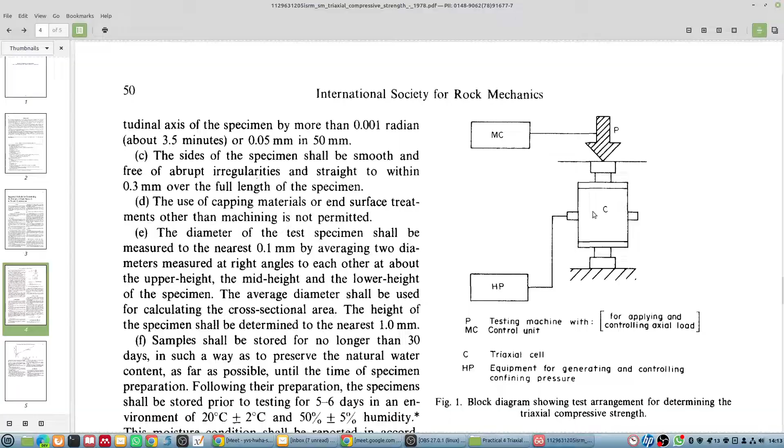So what you have to do is take at least 3 samples for testing, but the standards, whether it is ISRM or IS, recommend at least 5 specimens to be tested. So what you do is provide a confining stress of, say for example, 10 MPa, then here it is 35 MPa, here it is 45 MPa or so, and below these levels also 3 MPa or 6 MPa or so.

So one of the samples, say for example, you have provided a confining stress of 3 MPa, it breaks at some point, so that point is noted, and that is somewhere near, say for example, 85 MPa. That way you plot the lines, and then you try to get a regression curve, and from that regression curve you draw the line, and that will give you the curve for the failure criteria. And if you have carried out the regression, you will be able to know the equation of that line. So that's the basic purpose for determination of triaxial compressive strength.

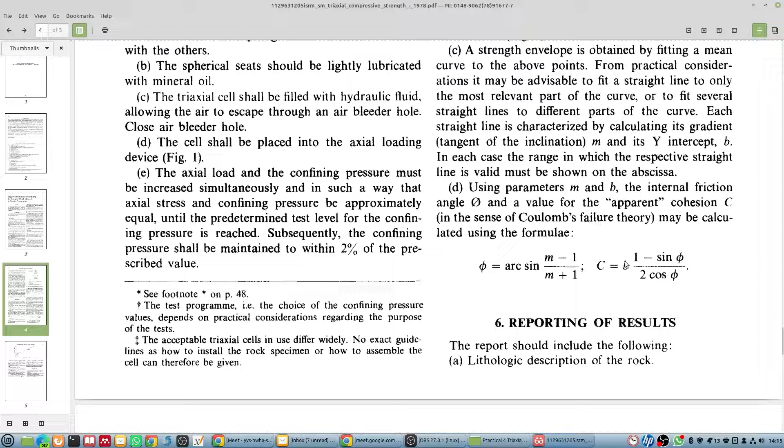Finally, the output you get from this is your C and phi values - apparent cohesion C and the friction angle. Here M and B are two constants which you get from this sigma 1 versus sigma 3 curve. M is the slope of this line, and B is the y-intercept, or the intercept on the axial stress axis.

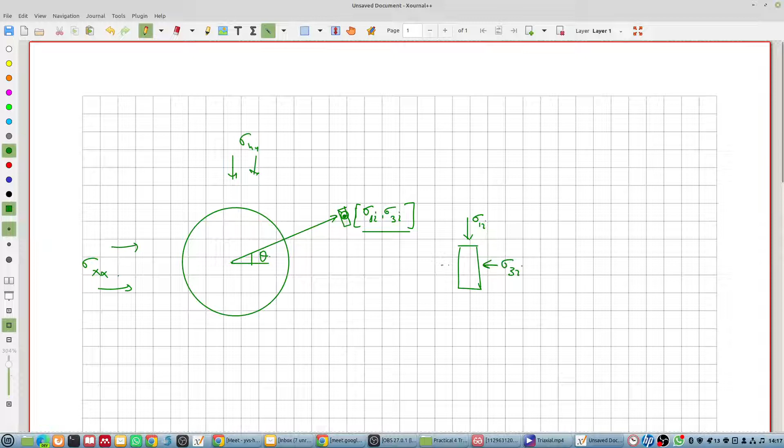So what is happening here is that this sample, or small element, you can take it as this sample. This sample is loaded from two sides with stress sigma 1i and sigma 3i. So this is known as your confining stress.

Right, you can look at this another way too. Say for example, if you take one element here, what happens? At the skin of the boundary, sigma r will be equal to 0 as per Kirsch's equation, if you see. And sigma theta will have some value. This is it, sigma theta. So here what is happening is that the rock is in a state of uniaxial compression.

Sir? Okay, yes, tell me. Sir, what is sigma RR and sigma theta theta? Have you studied this in your BTech? No sir, no. Okay, let me find the lecture material. If it is there, I'll show you.

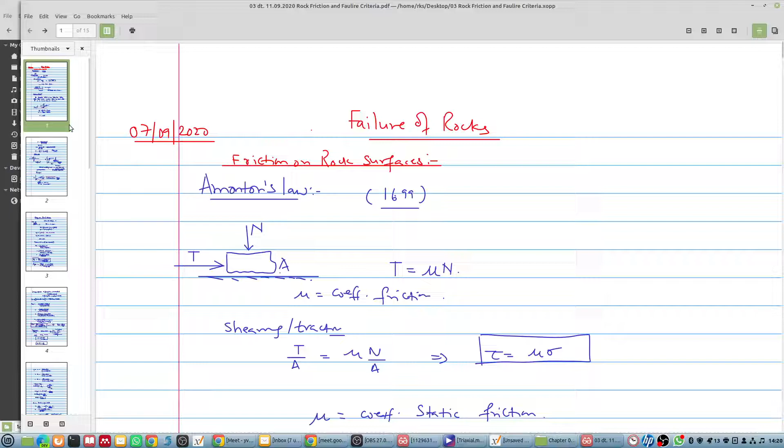This picture is very dirty and I have to write many things. Okay, anyway, I will not make it dirty further. So this is the tunnel which we had seen.

Kirsch's equation is given for a condition in which you are excavating a tunnel and your boundary stresses, or the in-situ stresses, are sigma xx and sigma yy - the pre-mining stress at this location. And then if your tunnel has a radius of a, then at a distance r, you can very well find the stresses, the components of the stress.

So you are a mechanical engineer, so you must have read solid mechanics and you know what is principal stress, what is shear stress, etc. Isn't it? Yes, sir. Right. So this is my tunnel.

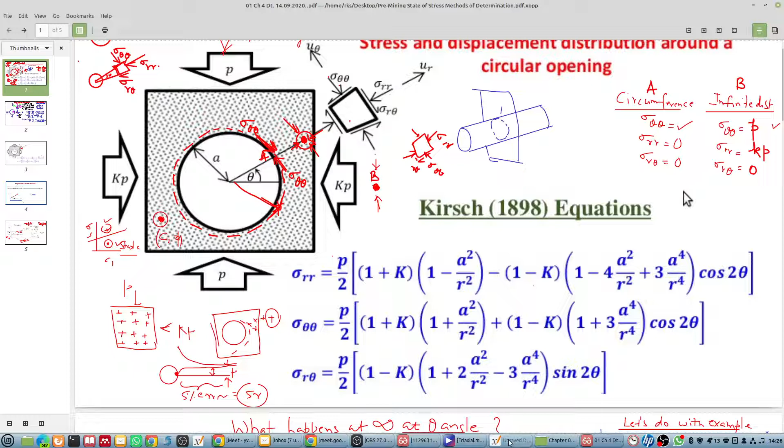So effectively what is happening here is that any element at the skin of the excavation is loaded only in one direction. That means your rock specimen is loaded only by sigma theta theta and not by any other component.

Now, let us consider the same thing. Is there an example? In this equation we have done it for this at infinity. What will happen, that exercise we have done. Sir, one minute, one minute. Yes, what was the doubt?

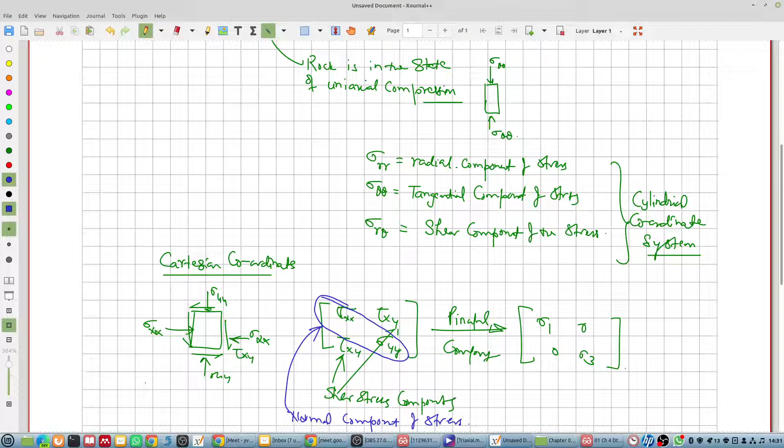Okay, for rock mechanics, shear on this plane, if it is down, then it is positive. So this is negative. Is it clear? Above is negative in rock mechanics convention. Mechanical engineers will do it the opposite way.

Why is that? Because all the stresses are compressive in nature in rock mechanics. So every time if compressive stress is taken as negative, when you calculate, a lot of negatives appear, which looks awkward. That's why rock mechanics people have preferred to take compression as positive and tension as negative.

Whereas mechanical engineers deal with a lot of tensile stresses, so they treat tensile stress as positive, so that in their calculations all positive numbers look good. That's the convention.

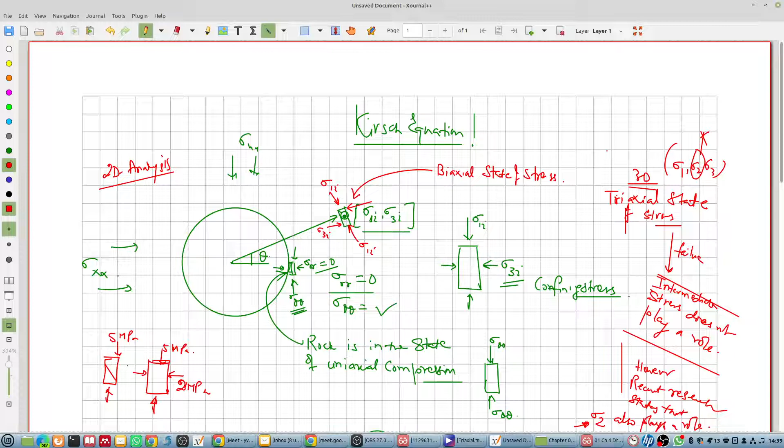Now tell me, if I apply 5 MPa and the rock breaks, but if I compress this rock by 2 MPa and still apply 5 MPa on the same rock, is it going to break? No sir, it needs some more pressure. This is what your failure criteria requires.

So what you have done is, on one side you have sigma 1, on the other side you have sigma 3. When sigma 3 is small, the rock will break at a smaller compressive load. Now on another sample, you increase it, so this is 1 MPa and this is breaking at say 5 MPa, and now you load it at 2 MPa. So it is going to break at a load higher than 5, let's say it is breaking at 7 or 8 MPa.

So that way you go on testing a few more specimens, increasing the confining stress, the side stress. That is known as the confining stress. Why are we calling it confining? Because the element here is confined from all sides, and because of the confinement, this rock will require more value of sigma 1 to break, whereas here there is no confinement, it is under uniaxial compression, so it is breaking easily. This is the way you try to find the curve.

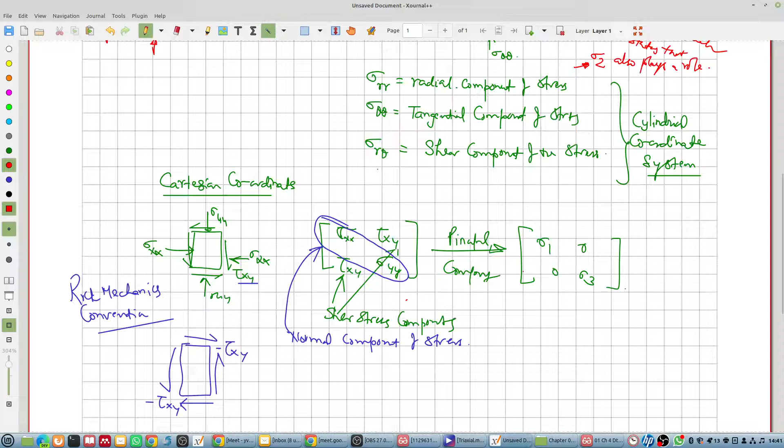So the Mohr-Coulomb curve says it is a straight line. Other authors will say no, it is a non-linear line. Many people have given curves for this failure criteria. So this is what we have to find out, and in order to simulate this confinement, we need a setup in the laboratory. So that setup, we will see how that setup is made.

Okay, now is that concept clear? Why? What is confined stress? How is the failure governed?

Yes, right. So as we go away, the rock is under triaxial state of stress in general. There the failure of the rock will be difficult, whereas near the skin of the excavation, the failure of the rock is liable to be more.

If the strength of the rock is very high and this induced stress sigma theta theta is very less than the UCS, then there will not be a failure. Here also there can't be a failure. So your...

Pre-mining stress state, the size of the excavation, and the strength of the rock - these three data will tell you whether there is going to be any failure at the skin of the excavation, or up to what depth the failure will be there. Sometimes the failure can be up to this depth also, like this. This depends upon the failure criteria, and failure criteria or the strength of the rock can be determined from this curve. Now is the concept clear?

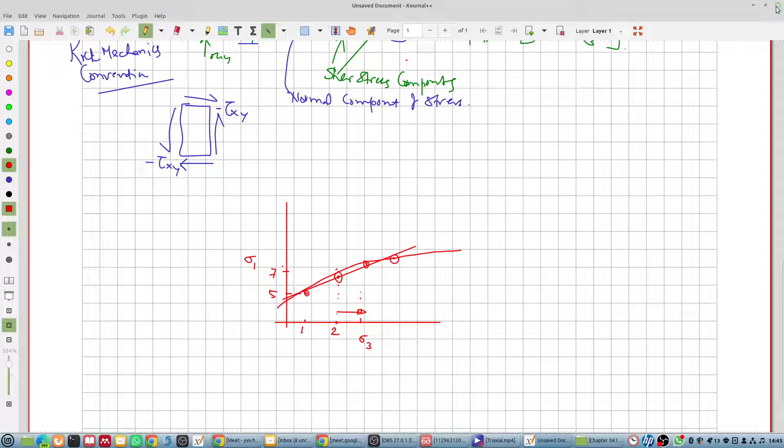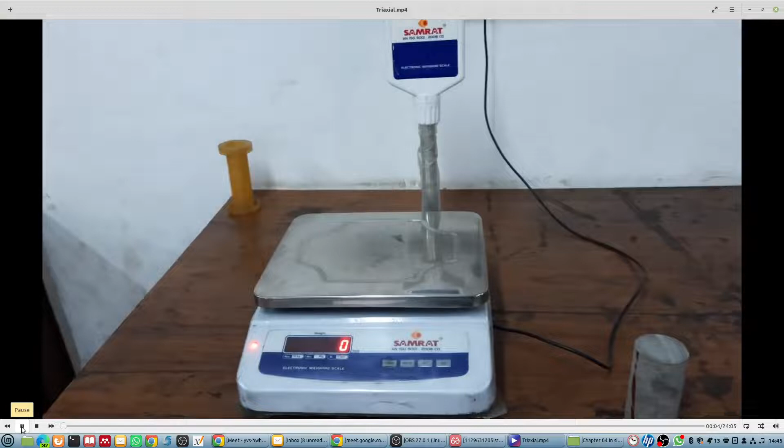Right, so how do we do the experiment? What you require is basically a weighing machine to know the density of the rock. You need a specimen.

And this is known as the triaxial jacket and the loading platens. We'll see how these things are used. This and you require a measuring tape, and this is your hoek cell.

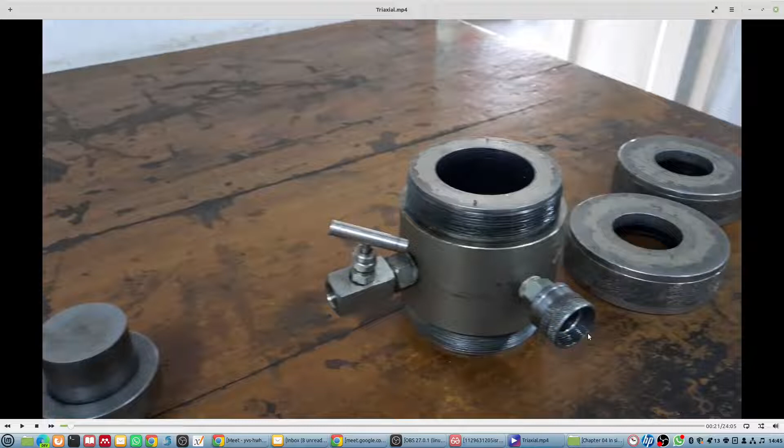It is nothing but a hollow cylinder through which you can place the oil. And when you place that hoek cell, that rubber thing you have seen, it will form a jacket, and then it will be able to provide load onto the specimen. These are the covers for covering the thing.

So this setup was designed by Hoek, that's why it's also known as a hoek cell or a biaxial chamber. Because why do we call it biaxial? Because we are applying sigma 3 on all the sides and sigma 1 from the top. So only two axes have the stress.

A little bit more you will see. So they weigh the rock to know the density, right? And if you calculate its length and diameter, then you can find the volume. From the volume, you get the density. That's why it's required.

Okay, so this is measuring. That is additional data. It's measuring the length.

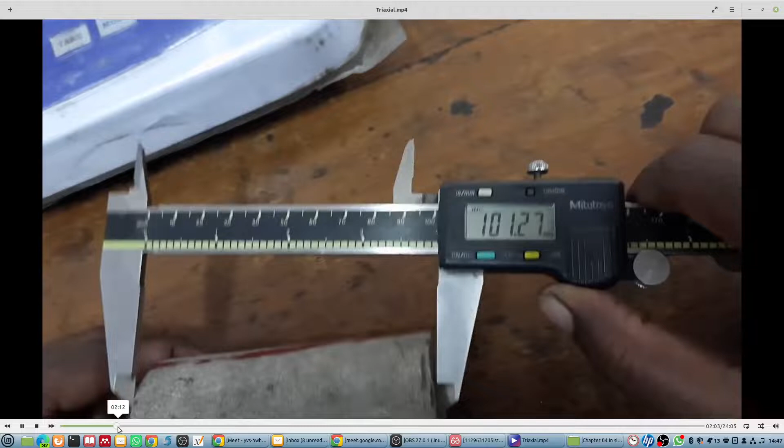And this is your hoek cell. Now inside this hoek cell, you have to place the specimen. And from outside this jacket, if you pressurize it through oil, then you are able to give a confining stress onto this. So that sample - this is hollow.

These are the two holes through which oil can be pressurized. This is for pressurization and this is for venting out the air from the cell when you are filling the oil. Right, so this hoek cell, they will first fix the jacket into it.

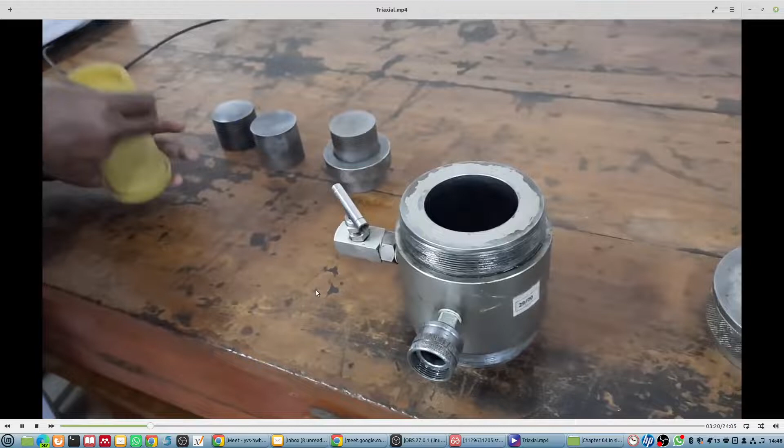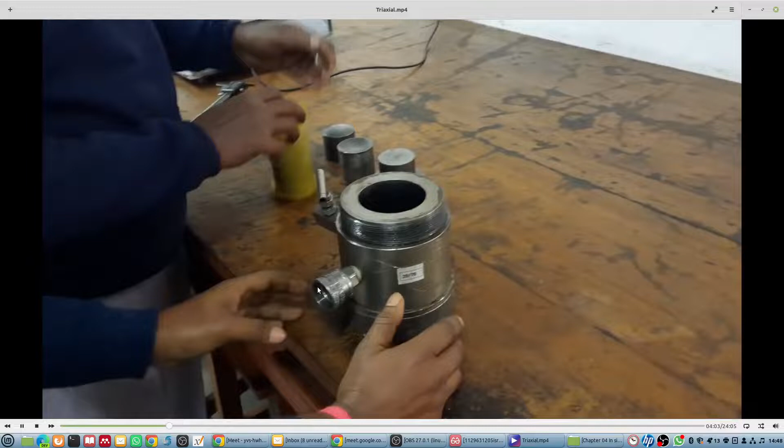This jacket they will first fix it into the hoek cell, and you see how tightly it will go. First we close it from one side. Then we place this jacket inside it. It's going like a piston.

Right, there, fixed it. Now you see, if you inject oil, what will happen? Between the cylinder wall and the jacket, oil will be filled. And if you pressurize this oil, what will happen? Because of that pressure, this rubber jacket will come out. So the rubber jacket should not come out - that's why we are placing a cap here. After that they will place a cap over this.

We give the platen from below for loading. This platen they are showing here. Then over this they place the specimen, then close the cap.

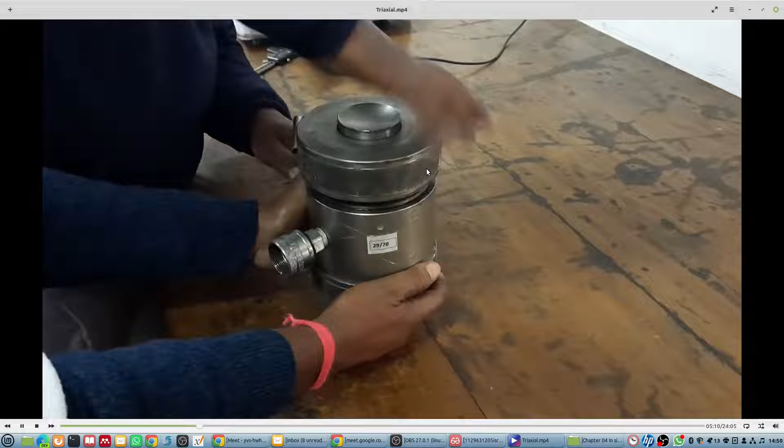This is the way they have fixed the specimen. Then they will place the cap, which will cover the jacket, the rubber jacket. So now whatever pressure you give, it will not come out, and it will compress the rock inside.

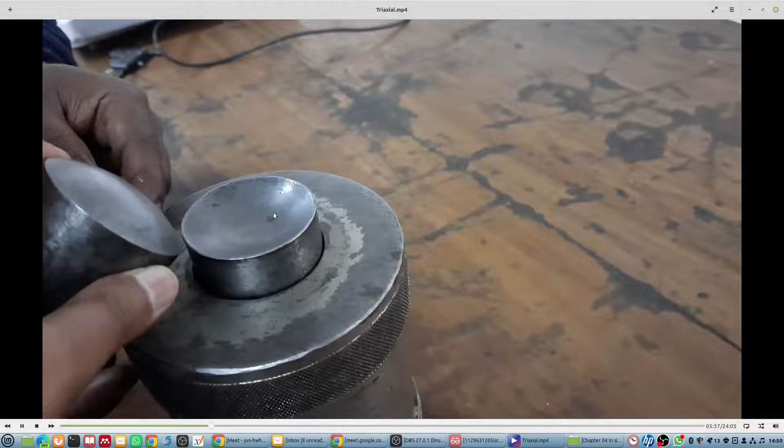This is the way you are providing compression confinement to the specimen, and from the top you can provide an axial load. This spherical seating is specially made so that even if the machine is not axially centered, it will center the load.

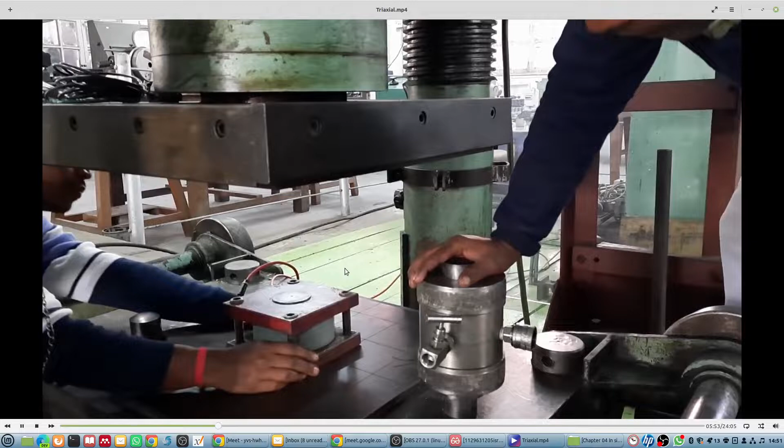Now you have to place this Hoek cell onto the compression testing machine. This is your load cell, to know how much load is coming onto the specimen. They will place this Hoek cell over the load cell.

They will try to lower the platen so that it just touches the spherical seating area. It should just touch the area.

This is the hose through which they will supply the oil and maintain the pressure. Through this hose they are pumping oil inside, and this tap is opened so whatever air is there will come out, filling the complete jacket, and then oil will start flowing. The moment oil starts flowing, you close this valve, and then you can pressurize the jacket with the pump.

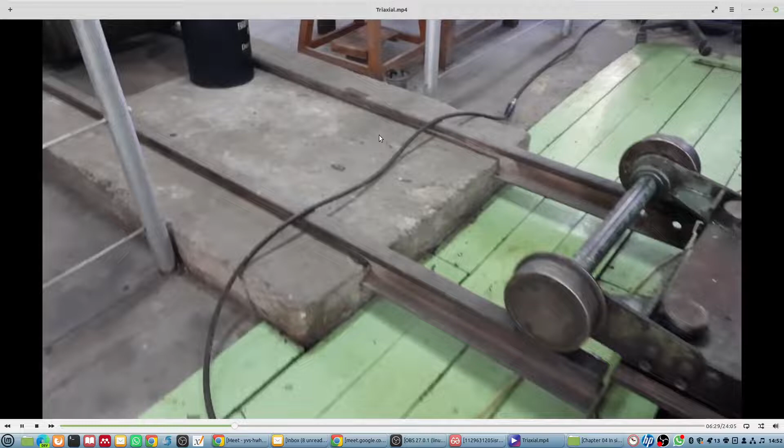Here they are venting out the air. This is the pump through which the hose from the Hoek cell goes, and through this pump we send the oil into the Hoek cell, and we can maintain a constant pressure on the specimen.

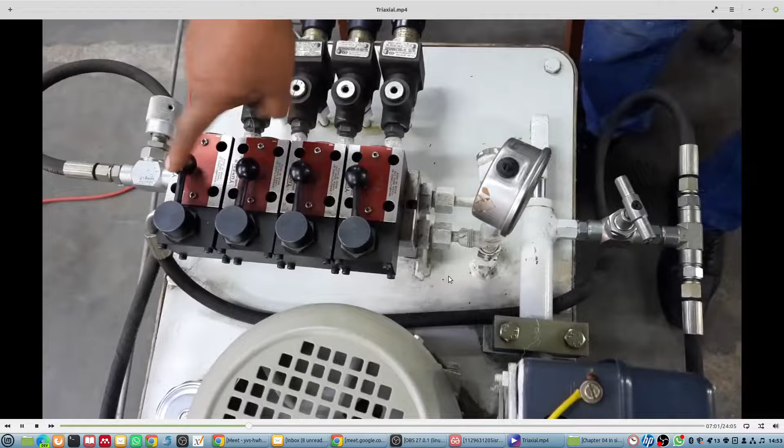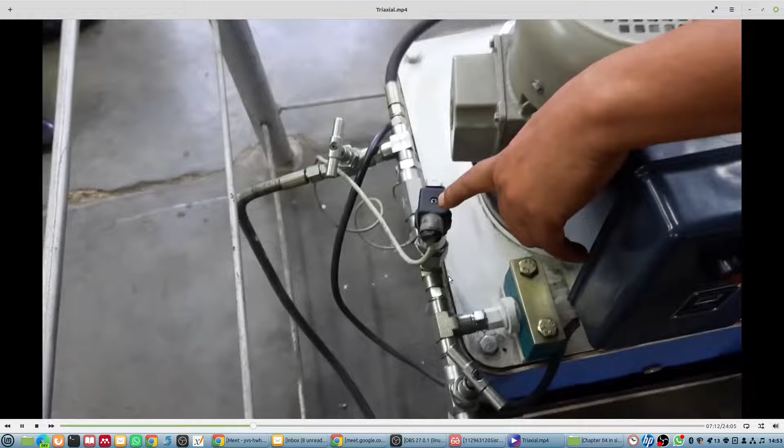This knob he is touching is used to control the flow, and there is a pressure transducer to measure how much pressure has been provided onto the Hoek cell. This pressure transducer reading is then sent to the data acquisition system.

He has opened the valve. Now he will switch on the motor pump. In place of this, you can use a hand pump also.

So they're sending the oil. Now oil has started flowing. They will wait a little more time so that all the air bubbles are completely driven out, then they will close it.

Now they will increase the pressure, so the increase in confining pressure can be seen from the data acquisition system also. Load and pressure, these two things will be monitored, that is the confining pressure.

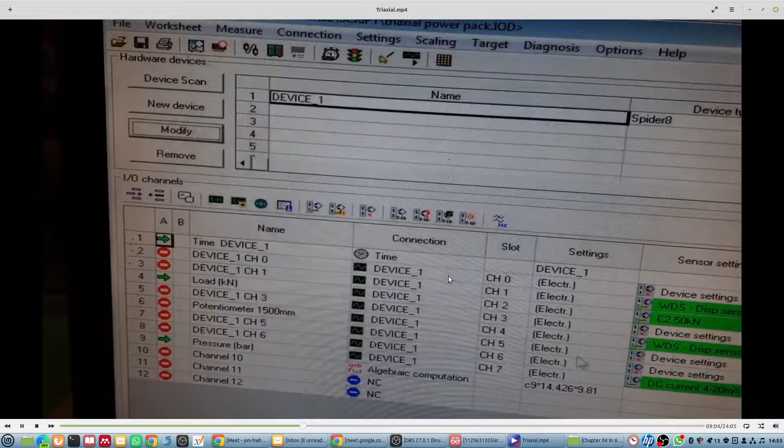This data acquisition part we had discussed in the uniaxial compression test. Same things are there. Then you have to go for logging.

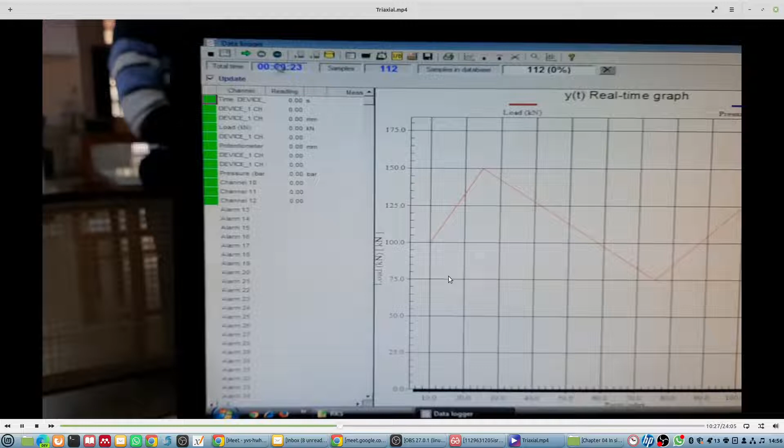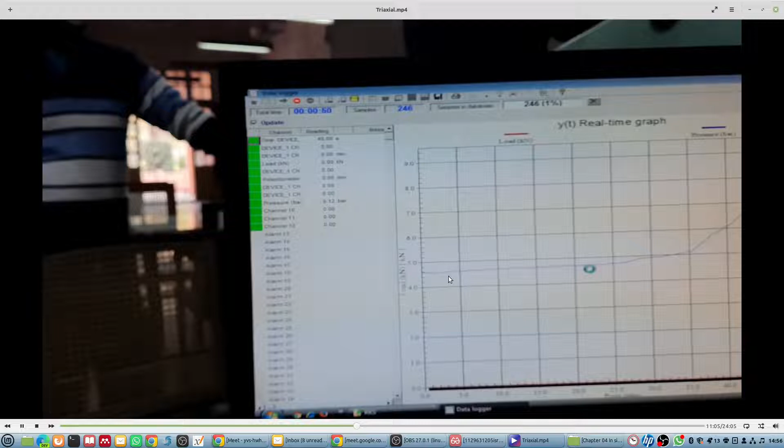Now they are increasing the pressure in the Hoek cell. That can be seen from this graph. Blue is the pressure in bar.

The first experiment will consider a value of 10 bars. That is 1 MPa pressure they have given.

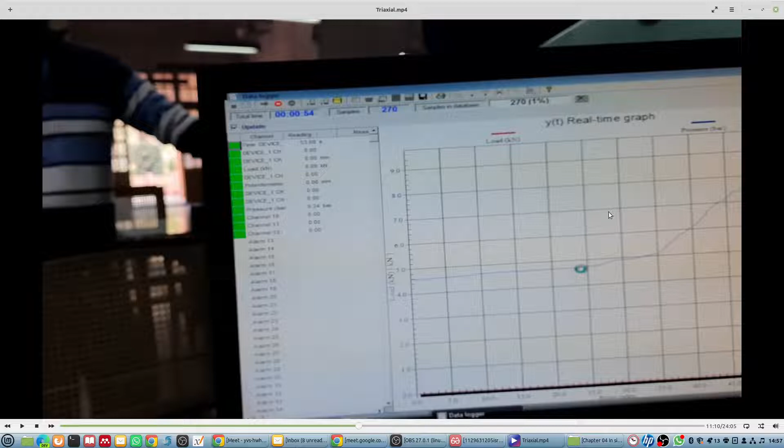10 bars given, yes, 10 bars. And then now they will start this loading machine for providing the axial load.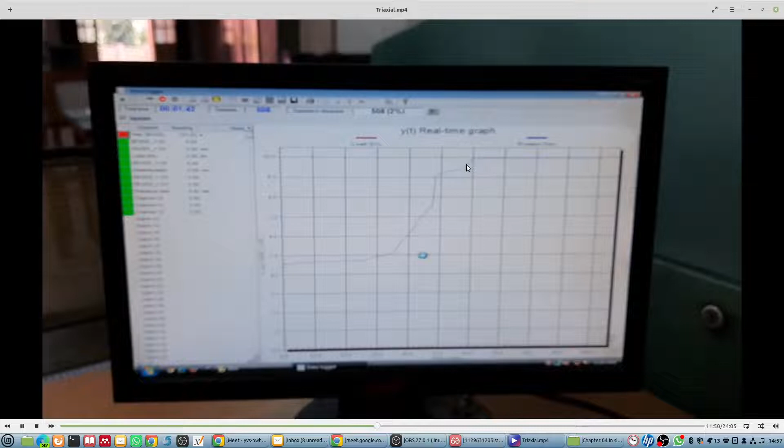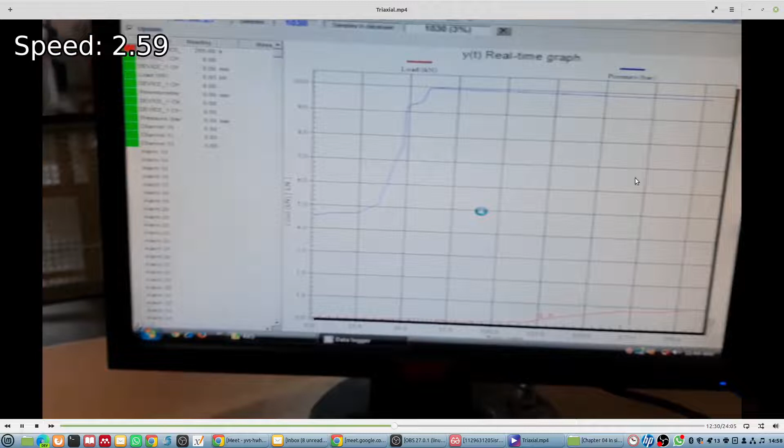Now, 10 bar maintained constant. Blue one is your confining stress, and now they are increasing this axial load, given in kilonewton. It will go on increasing. I'm increasing the speed.

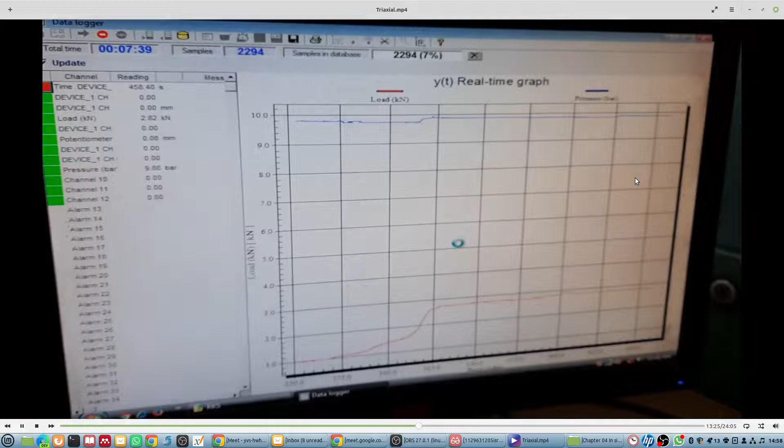So this has taken the load. The load it is taking now.

Anyway, we could not capture the failure this time. At the time of failure, your axial load will go on increasing, and then it will reduce suddenly. So there was an axial load versus time curve.

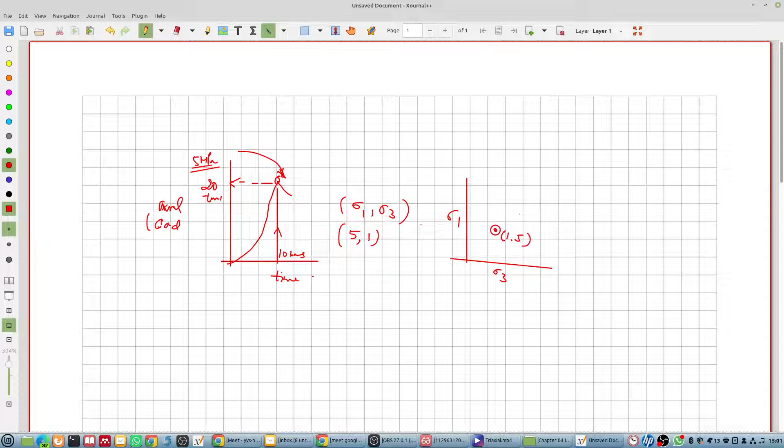So your strength is 5 MPa and sigma 3 is 1. For this curve, from one specimen, you got the point sigma 3 equals 1 and sigma 1 equals 5. So this point you got for your curve. Similarly, you will do tests for other points on the curve.

Once the specimen is broken, you can now remove the things and take out the sample to see how the fracture has taken place. Removing the sample is also a very difficult task - see how much difficulty they will have in removing this sample.

While inserting it was very easy, but now while removing it is very difficult. That's because the rock has broken along a plane and its volume has expanded because of the breakage. It's difficult.

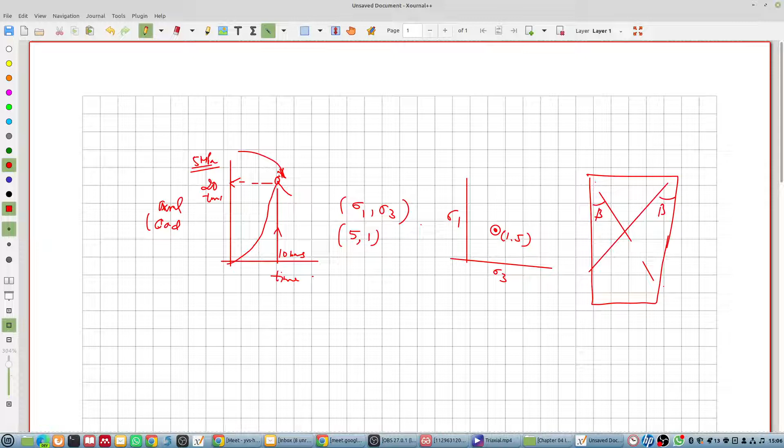Okay, it is something like this. One fracture angle is like this, another fracture angle is like this. Okay, and this is your beta angle. And here, this portion will look something like a cone. Right.

This is a part of another video. Anyway, so that's the way you find the normal load at the time of breakage. Okay, let me see that value.

Anyway, that value I will give you from the Excel. Okay, procedure is only shown in this video.

Now see, this is known as the process for each sample. For the next sample you can do, for the third sample you do this and then you find the curve. Another method is known as the multi-failure analysis, not multi-failure analysis, multi-failure triaxial test.

So what is happening here? This is axial load, and blue we can say as confining load, and this is your time.

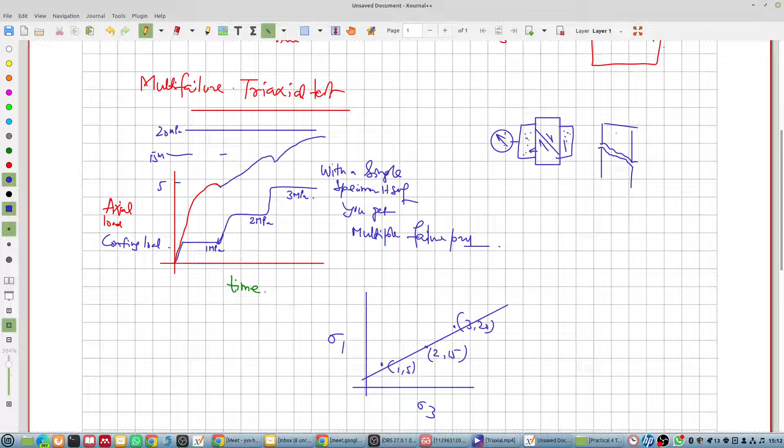And then you can get a curve. That first experiment, whatever video you have seen, was for the single failure triaxial test. In one go itself, the failure was seen. But if you have very less number of samples, you can go for a multi-failure triaxial test, and then find out the failure curve from a single sample by using this multi-failure test.

So in the video, we have shown one video for the multi-failure test also. One of the specimens was kept at 10 bar, another at 25 bar, another at some intermediate value between 25 and 50, and another at something greater than 50, and another between 60 to 75. So one level, two level, three level, and fourth level.

Fifth we were trying to do, but the sample broke away. So at least 1, 2, 3, and 4 — four points we were able to get from a single sample.

Sir, what is this point index here? In the x-axis? That is the time. In fact, while making this calibration, they might have forgotten to remove this. These are all user-defined things. So in fact, this is the time in seconds.

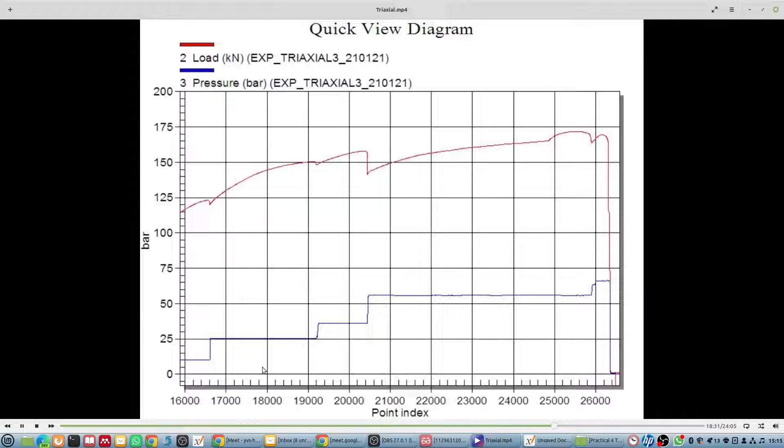In the data logger, you have the option to mark the points also. So x is your 16,589 seconds. Y is your bar, the blue line, so that is 10 bar. Then 25 bar, 35 bar, 35 bar again, then 55 bar. At 16589 time, it was 122.8 kilonewton, then 149.57 kilonewton, 157 kilonewton, 170 kilonewton. Like that, you can get those data from the data acquisition system also.

So this is showing you the complete view of what has happened with a single sample in multi-failure analysis. After the multi-failure analysis, let me show you what happened. We wanted to conduct more tests beyond this, but controlling the confining stress was a bit difficult at this point, so we could not get anything and the sample broke completely.

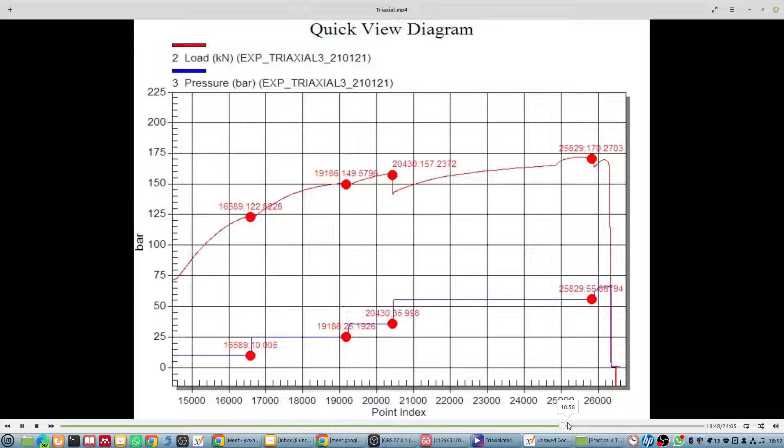The moment a failure is initiating, you have to take action immediately to increase this load. Otherwise, it is very difficult to maintain a multi-failure experiment. After the experiment, they are trying to remove the specimen. Now here you can see the kind of failure — clear cut, two planes you are able to see in the failure.

This was a very slow rate of loading. In fact, you can take out the things and see — they have to hammer it a little bit, because the failure had initiated, but complete failure has not taken place. Here on the top, it's just like a cone. They will hammer a little bit so that this failed thing can be removed out. Here are two planes of failure you are able to see — a perfect shear failure.

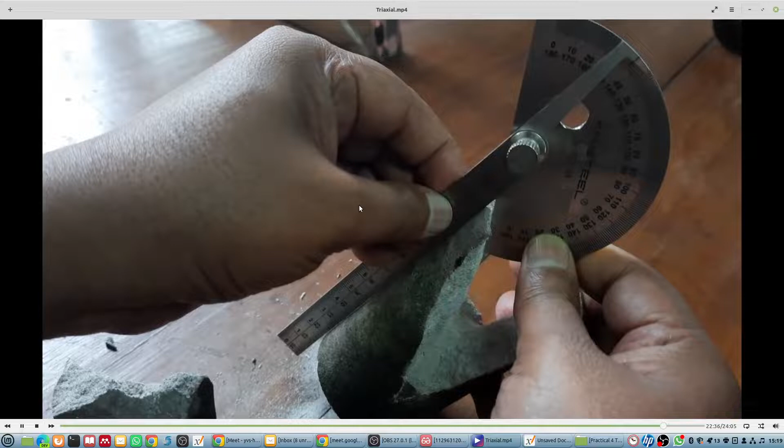And then by using this protractor, you can find the angle beta, and then you can even draw more circles. So that's the experiment. And coming to the data and its analysis, a linear regression.

This experiment, we tried to do for a low confining stress — low confining stress of 1 to 5 MPa only: 10 bar, 25 bar, 35 bar, and then 55 bars.

So this table is showing you the confining pressure that you have maintained, and here this is the breaking load in kilonewtons that you have got for different samples. Once you know the diameter and the area, you divide by the area, and then you find the breaking strength in MPa. So this breaking strength is sigma 1, and this confining pressure is sigma 3.

So for making the graph of sigma 1 versus sigma 3, we took the same data and made the graph. Now what you see here is that at low confining stresses, the slope of the line is very high, and as you go on increasing the confining stress, the slope becomes shallow. This is something like the same curve you see here — at low confining stresses it has a high inclination, and as you increase the stress, it becomes saturated, a straight line.

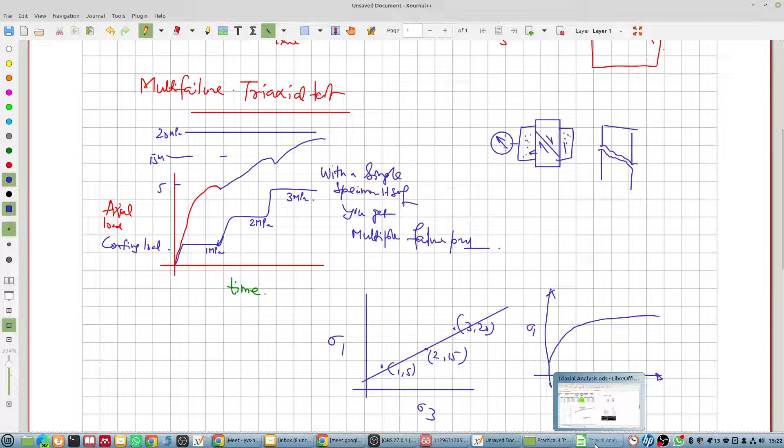So here for the analysis as per the ISRM method, what you need to know is that your curve is given by sigma 1 equals 2c cos phi by 1 minus sin phi plus sigma 3 times this value. This is the equation of the curve. Suppose you make this term as B and the second term as M. So you can find the linear regression using Excel. So fx is equal to, that means sigma 1 is equal to 4.28 sigma 3 plus 50. So your B is the intercept, B is equal to 50.82, and M is equal to 4.28 with this equation.

Now here M is equal to 4.28. So using componendo and dividendo you can find the value of sine phi. And once you know the value of sine phi, you can take its inverse to find the value of phi, that is the internal angle of friction. That value turns out to be 38.4 degrees. You can check the calculations, I will share this Excel with you. Once phi is known, put this value of phi here, and B is equal to 50.82, you can find the value of C. So your apparent cohesion is 12.28 MPa.

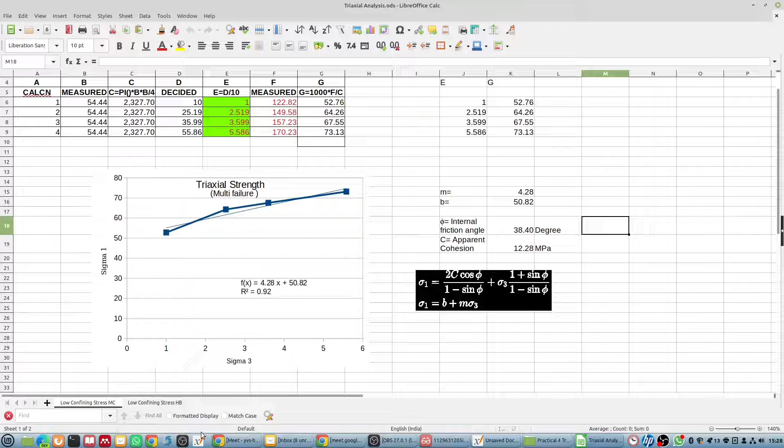So with the Mohr-Coulomb failure criteria, the UCS you are getting is 50.82, and let us see what Hoek and Brown is giving, 50.36. So this is 50.36 and this is 50.82, more or less the same. So this is the way you can do the curve fitting, and if complicated formulae given by different researchers are given, then of course you can carry out the nonlinear regression, and then you can find out the curve for the failure.

So these are the two examples through which I have shown you how to utilize it for the Mohr-Coulomb failure criteria in one sheet, and another sheet showing how to utilize it for the Hoek and Brown failure criteria. So this completes the discussion today.

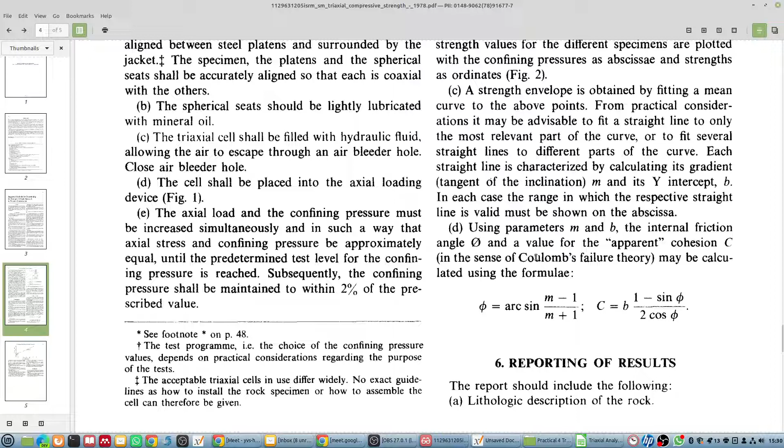In fact, I told you Mohr-Coulomb. Strictly speaking, it is Coulomb theory. Loosely, people sometimes say it is Mohr-Coulomb. When we see the failure criteria, then we will understand what was the Mohr theory and what was the Coulomb's modification. So it's loose speaking to say Mohr-Coulomb theory, but strictly speaking it is Coulomb's failure criteria. Any query, any doubt? If you have, we can discuss.

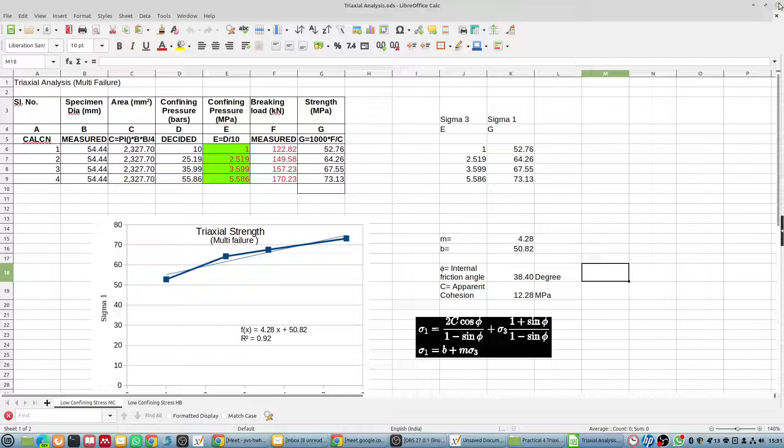Sir, have we taken B equal to 50.82? Yes, this one, 50.82.

Sigma 1 versus sigma 3. This equation is sigma 1 is equal to 4.28 sigma 3 plus 50.82. So your intercept is 50.82. So what is this coordinate? Coordinate A is equal to 0, comma 50.82, isn't it? Yes, sir.

So at (0, 50.82), what is the configuration of your specimen? Sigma 1 is equal to 50.82 and confining stress sigma 3 is equal to 0, isn't it? Sigma 3 is equal to 0 at point A.

Sir, we got that 50.82 value at 1 megapascal confining pressure, right? No, no. What is that? At 0. From this equation, what we are getting? 50.82. This is the equation, no? So when sigma 3 is equal to 0, sigma 1 is equal to 4.28 into 0 plus 50.82, which is equal to 50.82. This value we have not got from the experiment, we are getting it from the equation. Is that clear? Yes, sir.

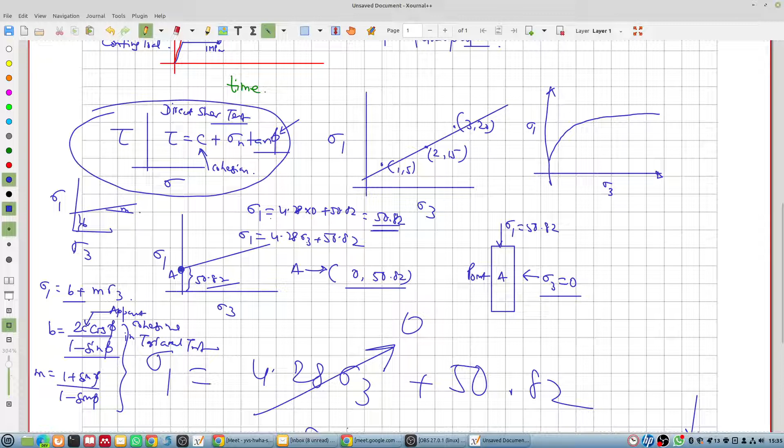Anything more? Sir, once more please. Angle of internal friction, I couldn't find the pointer. What doubt are you having? What do you want to know? How can we define angle of internal friction, and how does it relate to this one?

How the question normally comes is: is the angle of internal friction same as the angle of repose also? This comes up. Suppose you have a granular material, and if you make it a heap, so this is going to make an angle theta, okay, so that is known as the angle of repose.

But angle of internal friction is not equal to the angle of repose. One thing. Another point: angle of internal friction is an inherent property of the rock material. In fact, for soil also, you can find angle of internal friction, for that there is a separate setup. So for soil also, angle of internal friction is not equal to the angle of repose.

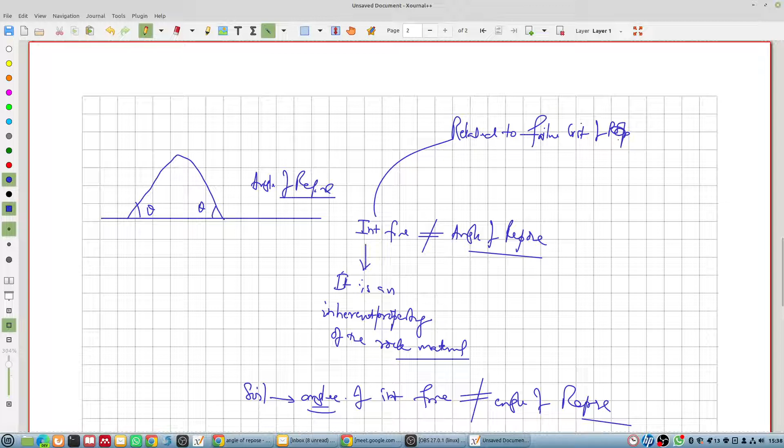Angle of repose, it is from horizontal only, right? Are you able to correlate now? Angle of internal friction is related to failure criteria of rock. That is determined from tau versus sigma n, or from the sigma 1 versus sigma 3 curve. Here you find angle of repose directly. Am I able to make any sense?

Yes sir, okay sir, or you wanted to know something different? Okay sir, has it made any sense, or what exactly you wanted to know? Sir, I didn't ask about angle of repose, but actually what means angle of internal friction? Angle of internal friction only I asked about.

It is an inherent property of a rock material. Sir, from the graph, can we know it directly, where we can find it, like the m value? Yeah, few of the rock mass classification systems we have studied, in which you are able to correlate C and phi.

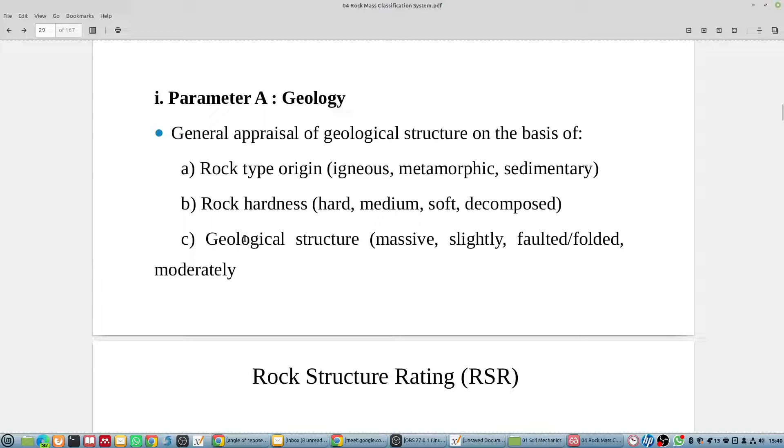When you are able to find rock mass rating, people have tried to correlate RMR with C and phi.

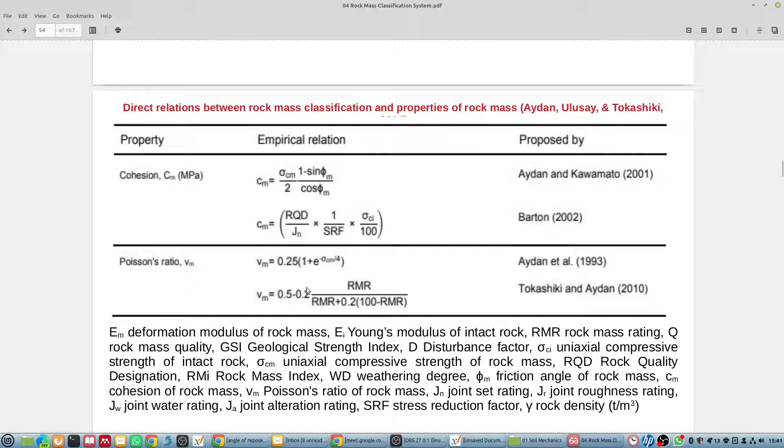Have I given the table? I think I had given the table. See, you can utilize these values to find the friction angle. This is the way you can find out friction angle or the angle of internal friction.

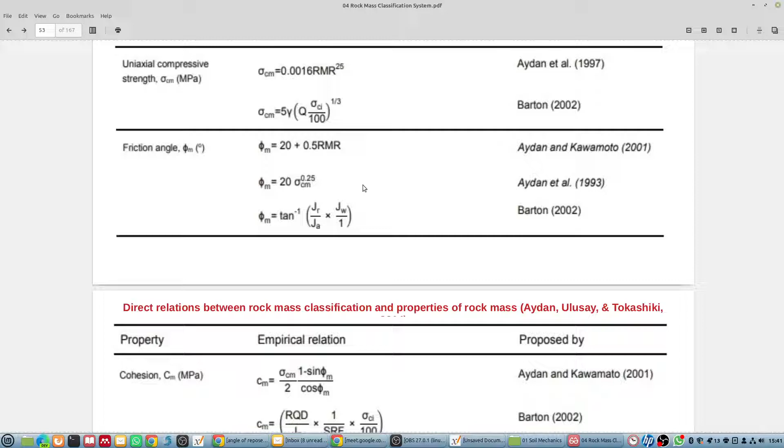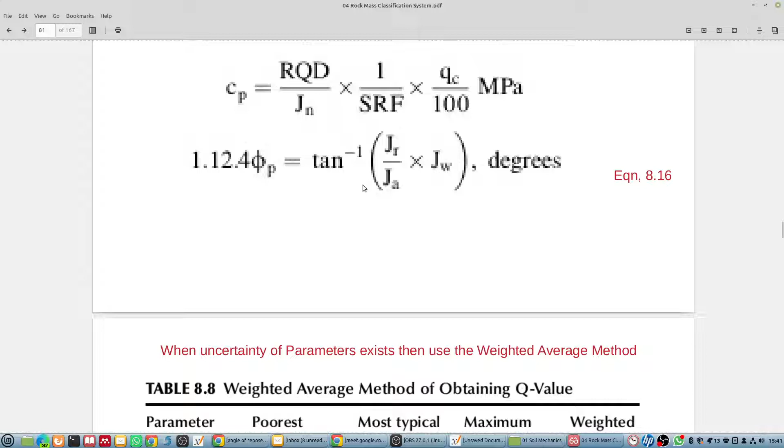You have to, you don't need to remember the table. You have to remember what is given inside this table, that is more important. Barton also gave values for C and phi.

Got it? So after seeing these rocks, you can use this classification for rock mass C and phi.

But whatever we have determined is basically our C and phi of the intact rock in the laboratory.

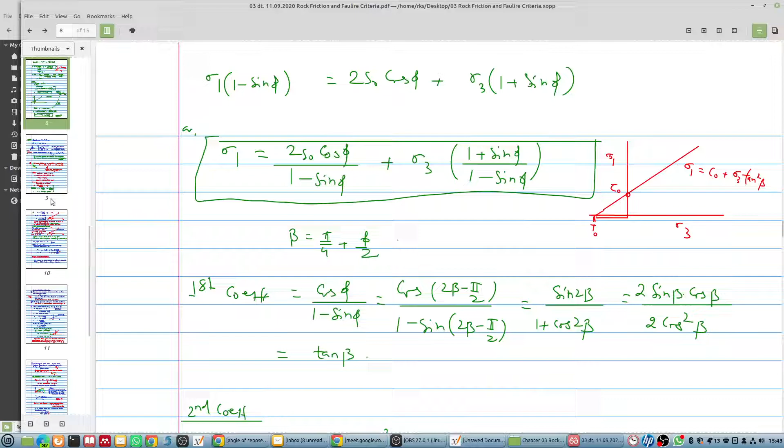Beta is equal to pi by 4 plus phi by 2. This is what you get from your failure criteria.

Okay, and this beta we have defined somewhere as tan square beta is equal to 1 plus sin phi by 1 minus sin phi.

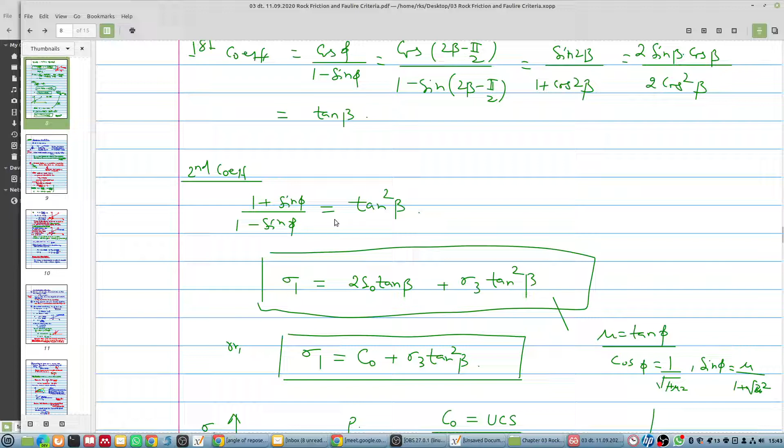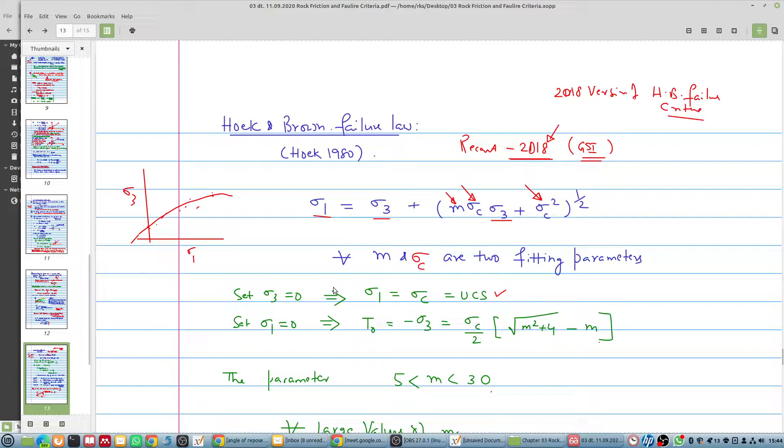Okay, so from there if you find the failure, from that you can find it. From the experiment you get beta, and this is what comes out. It is not there, so you can use that formula, beta is equal to pi by 4 plus phi by 2. So from the failure criteria, an estimate of phi will be available to you.

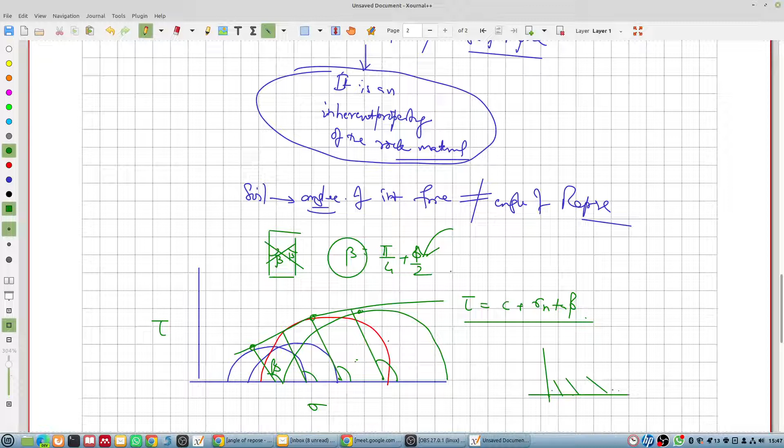तो बीटा आप एक्सपेरिमेंट से निकाल लिए, फाई यहाँ से निकाल लो, एक सैंपल से मिला है तो. हाँ, लेकिन जब आप टेस्ट करोगे ना, सो ऑल दिस बीटा विल बी डिफरेंट. Okay, and your curve is never a linear curve, it is a non-linear curve. That is why the standard says कि आप at least 5 specimen test करो, and then you take the regression, and then you apply whatever failure criteria you want to make.

So did I make sense or was it nonsense? यही पूछना चाह रहे थे आप? यस सर, यस. ओके, गुड, नाइस क्वेश्चन.

So I had one question. In this experiment, we used the confining fluid as oil. So can we use water as well? Yeah, you can very well use water, but water pumps are a very costly thing because when you use water with a pump, all your material has to be of stainless steel grade, and it becomes costly to maintain the parts of the pump. That's why people go for hydraulic oils because they will not allow the material to rust. Okay sir, and can the results vary with the change in the confining fluid? No, no, it's a confinement pressure, it's not going to vary. Okay sir, thank you.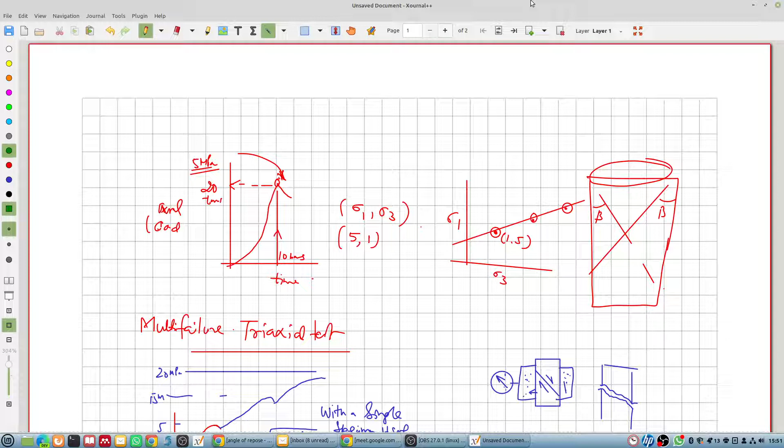सर फाइल में ग्राफ दोनों का फेलियर क्राइटेरिया का लगाना है? फाइल में देख लो, सीख लो, आप बना लो, एक का भी चलेगा, बट यू मस्ट अंडरस्टैंड हाउ दिस Hoek and Brown फेलियर क्राइटेरिया का जो सॉफ्टवेयर आप लोग यूज करोगे. Okay, I think is having a software. When you are back to campus, you can use the Rocscience software. और Rocscience सॉफ्टवेयर में जो निकाला है उन्होंने, जो निकालते हैं वो लोग M and S parameter, m and sigma ci parameter, they do it by their calculation in the software. And that software is very similar to what we have done in Excel.

These things, discussion, discussions. The failure criteria part, stress related, everything that you have written. Which one do you want? I will save it and give it to you. Wait, tell me which one you want. I'll save it on the desktop so that I can upload it.

The one that I have shown you for the Kirsch equation, that's what you want? Yes sir, yes. फेलियर क्राइटेरिया भी चाहिए. Yes sir. Will do. फेलियर क्राइटेरिया दे देता हूँ. फाइल सेव ए कॉपी डेस्कटॉप. फेलियर क्राइटेरिया दे दिया.

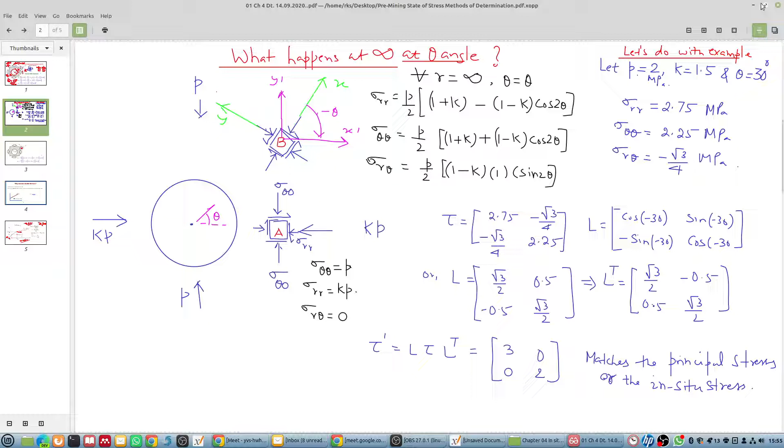That Kirsch equation, no? Before in-situ stress, normally we deal with this. Okay, yes, one more thing I will give you. Wait, I will show you how you do regression by hand.

अभी दिखाता हूँ. अच्छा ये प्रॉब्लम हो गया था. Regression का somewhere some notes I had given to the students. है क्या? No, it's not there. Okay, if I find that document, I'll give you.